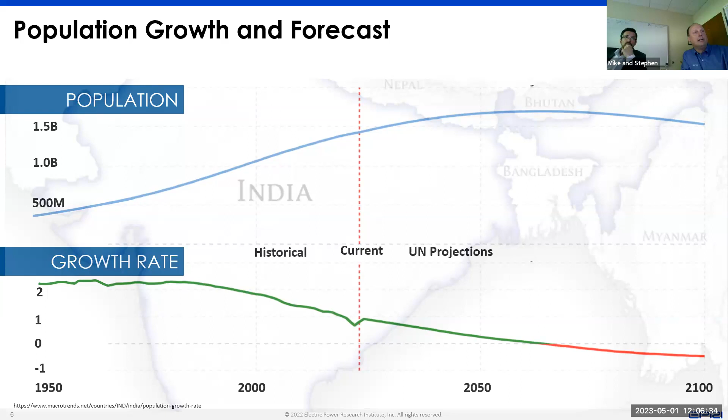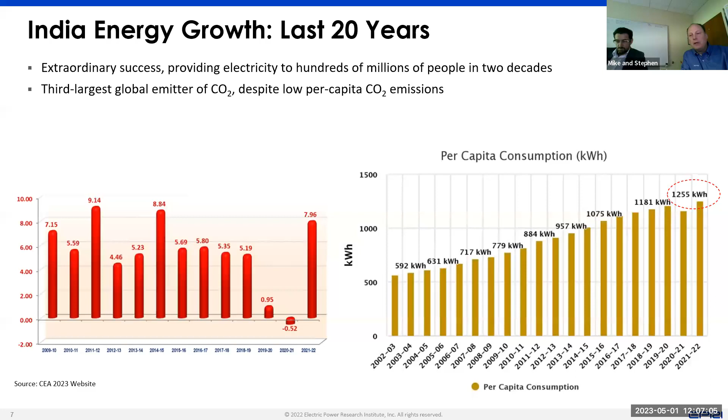There's been a lot of growth in population and in the power generation source. Over the last 20 years, you can see on the bar graph to the left what that extraordinary success looks like in providing power to hundreds of millions of people in India, with a consistent 7 to 8% growth rate over the last 20 years. But what's unique about India is that even though they're the third largest global emitter of CO2, it has a very low per capita CO2 emissions profile.

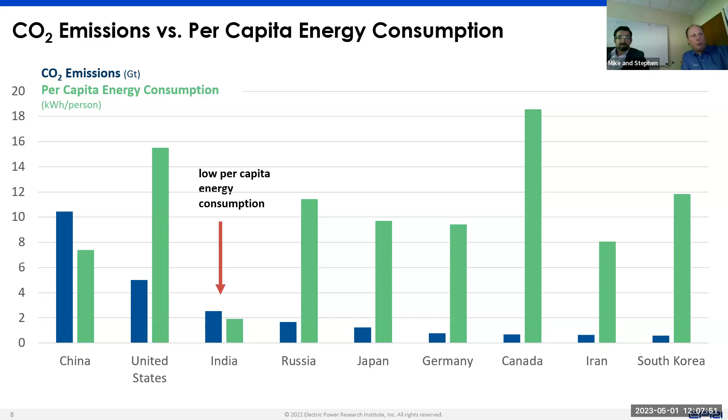If you compare that low per capita energy consumption to China or the United States, the blue bar represents CO2 emissions per country. India is very low, 1,255 per capita, compared to China which has almost the equivalent population. That's important to think about when looking at global CO2 emissions and the world emissions outlook from a decarbonization strategy perspective. Mike will shine some light on that later. You can see where India is today, where China is today, and try to figure out where India will be in the next 15-20 years. It's going to be an interesting story yet to come.

So to put that in perspective, where does most of the power generation come from in India? It's no surprise that most comes from thermal coal plants. The black bar shows January 2022 to January 2023 data. Power generation from coal-based thermal assets is somewhere between 107 to 120 billion units of total power generation, compared to nuclear, the orange bar, and hydro, the blue bar, which is very low.

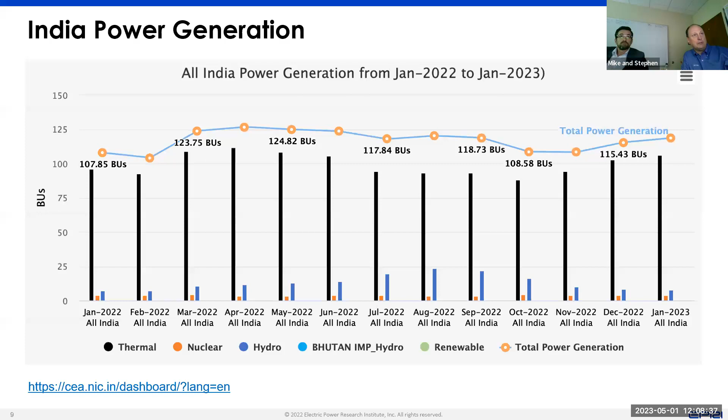Now, if we compare that thermal-based generation to renewable-based generation, in that same 2022 to 2023 time frame for India, we're somewhere between 10 to 12% total renewable capacity. This is all the renewable generation in the form of wind and solar.

We always see an uptick in wind generation right at the onset of the rainy season in India. Between May and June is typically when we see the peaks in renewable energy generation. That represents about 10%.

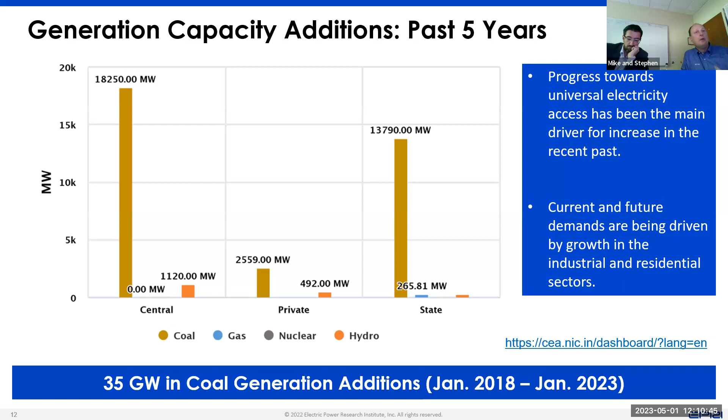What's fascinating about the energy transition in India is to see where they're going in the next 10 years. A lot of progress towards universal access to electricity. If we look back 5 years, even though there's been a lot of growth in renewable generation, India had 35 gigawatts in coal generation additions between 2018 to 2023.

A lot of that in the central plants. A lot of changes have happened in India over the last 20 years. When we look at decarbonization strategies in the United States and Europe, it's very different than decarbonization strategies in India. Most of India's strategy for decarbonization or reducing carbon intensity has been to shut down the older subcritical thermal generating plants and go to more supercritical, more ultra supercritical.

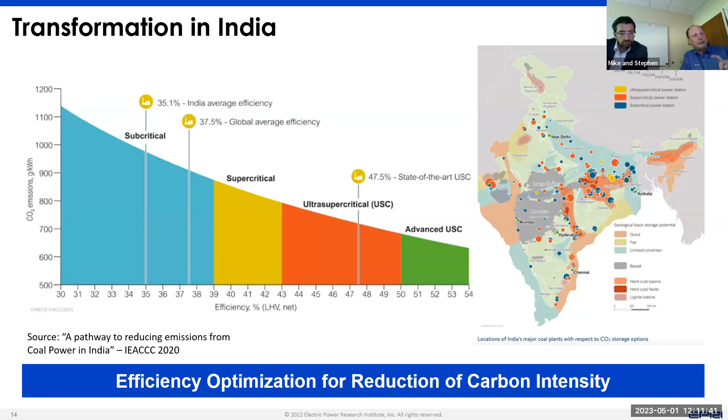Most likely we'll see one of our first 760C plants built in India or China in the future. So the focus has been to optimize decarbonization by improving the efficiency of these plants. What we've seen over the last 20 years is that heat rate is very important—the efficiency of these thermal plants, how we operate them.

Typically, if we want to put it in three buckets, the opportunities for air pollution control relate back to optimizing boiler efficiency, optimizing turbine efficiency, and reducing the aux power of these plants. What we've seen historically is if these units aren't operating at their design efficiencies as built, they can have an increase in actual emissions on the magnitude of 25%.

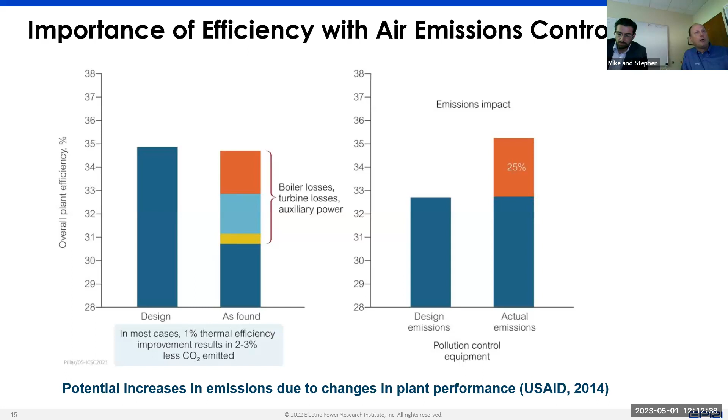And that might be all emissions—NOx, SOx, CO2 footprint. So anytime we can gain a 1% thermal efficiency improvement, this typically results in somewhere in the magnitude of 2 to 3% less overall CO2 emissions emitted.

In 2019, India commissioned their first ultra supercritical plant, a 1320 megawatt plant at Khargone Station, 603 degree C plant, 270 bar. A lot of environmental controls—you can see this unit had wet flue gas desulfurization, hydrated lime for mercury control, and a ZLD system for managing water treatment, which is a significant issue in many parts of India where water constraints exist.

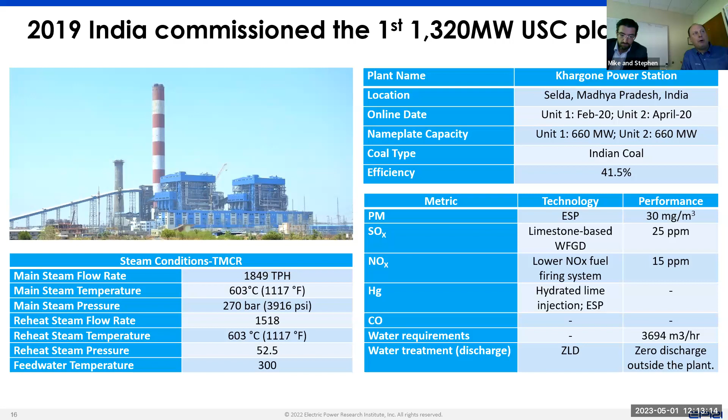When I look back to 20 years ago, when I made my first trip to India and drove down the highways looking at the emissions, looking at where India has gone over the last 15, 20 years, there's been some significant improvements in air quality and air emissions.

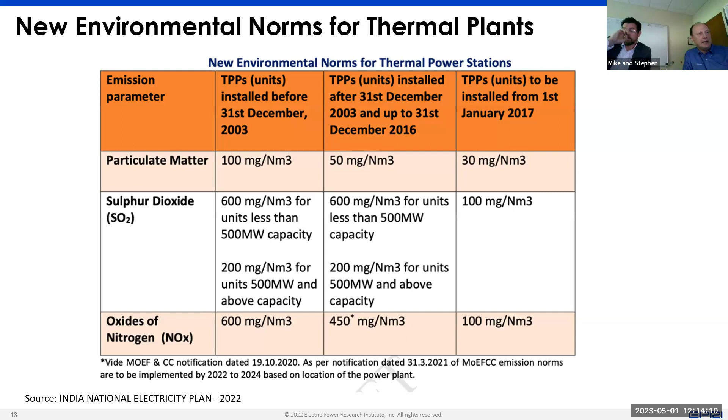We can look here at what India has done with their environmental norms, comparing units built before 2003 in the far left column. In 2016, we saw a pretty significant tightening up of the particulate matter and the SO2 and NOx emissions requirements. Now anything built after 2017, we can see those environmental regulations continue to tighten up in India.

So a lot of changes in environmental norms, how you're managing those norms, but probably the biggest change I've seen in India over the past 5 years has been really politically driven. Prime Minister Modi has made some pretty significant commitments for India. What I'm representing here on this slide is some of those commitments: 500 gigawatts of non-fossil energy capacity by 2030, 50% renewable energy by 2030, 45% economy-wide carbon intensity reduction by 2030.

Notice I didn't say total decarbonization, because India's carbon footprint is actually increasing, and it will continue to increase because of the demand for power generation in the next 10 years. But their economy-wide emissions are going down because they continue to integrate more advanced supercritical units. They're also integrating more renewable energy. So pretty substantial change when you look at that portfolio change.

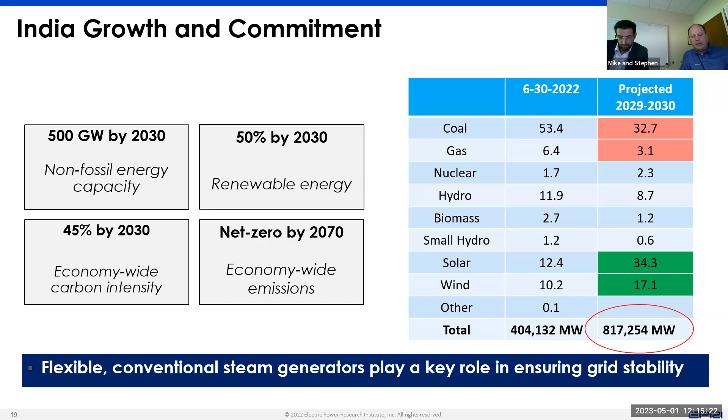To be able to get that 50% non-fossil power generation goal, that means a lot of solar, a lot of wind generation that operates at a much lower capacity factor is going to be operated. So they've got to have a much larger generation portfolio to meet current demands, which is just over 200 gigawatts of power generation by 2030. The forecasted expectation for coal-based thermal plants is going to be something closer to 250 gigawatts of generation.

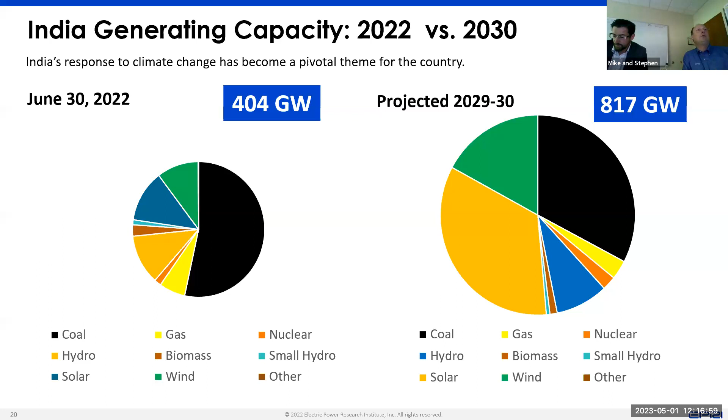But to be able to meet those targets that have been committed to by the country, this is what the expectations are. Again, pretty ambitious. I don't know if India will actually achieve that 817 gigawatts of power generation, with 50% from renewables, but they're certainly strongly heading towards that path forward.

So if we look at India's energy growth over the next decade, these are just some different scenarios. Say if we have delayed nuclear, delayed hydro, conservative estimates, or increased demands—people buy more refrigerators, more EV integration, or demands go up—there's forecasted to be somewhere between 240 to 260 gigawatts from coal-based generation to meet those demands with balance in the grid.

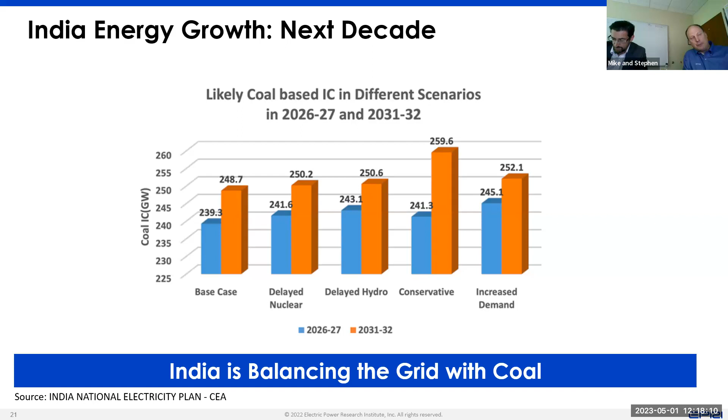What's different with India is if we look at North America, if we look at Europe, and see how we're balancing the grid, we're doing it with thermal generation, but most of that is coming from fast start gas turbine engines or combined cycle gas units that have a much greater overall thermal efficiency, whereas India is really balancing the grid with coal-based thermal generation because they have such a small portfolio of gas. They don't have the same infrastructure from gas and hydro as we see in other parts of the world.

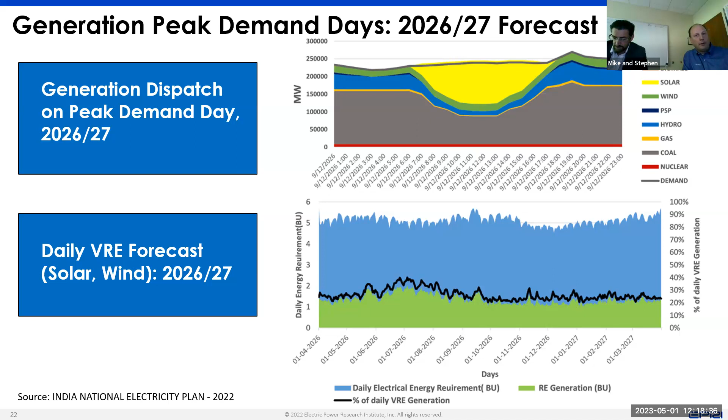So this is some of the forecasts for VRE integration. Remember, where we were in 2022 was somewhere between 10-11% total VRE generation. By 2026, 2027, India is looking at somewhere between 20 and 30% total generation. We really see that duck curve starting to form over the next few years in India.

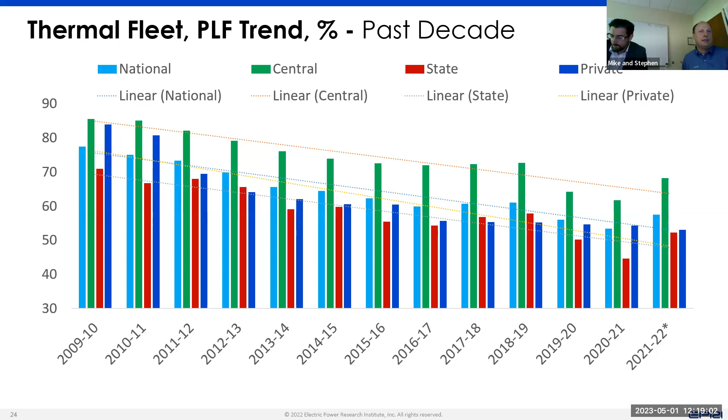And then when we look at the demands on those thermal plants, what's that doing to the thermal-based generation? We could just look back in the rearview mirror at the last 10 years. If we look at 2010 to 2021, 22, we can see that thermal-based coal generation went from somewhere closer to 90% capacity factors all the way down to something closer to 70% capacity factors on average.

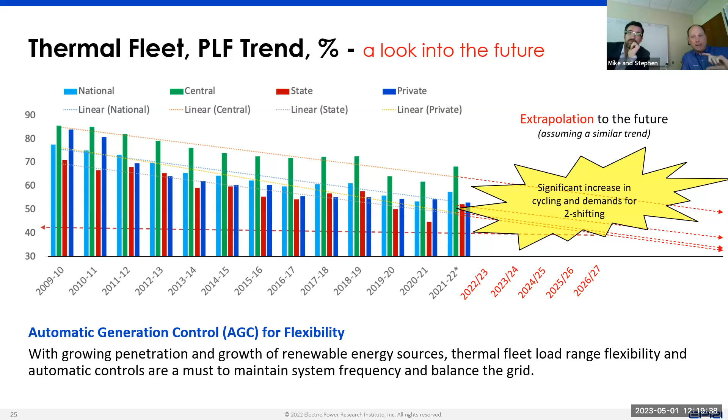And then if we look at what that trend looks like in the future as we go forward, and we look at that 2026, 2027 duck curve and bring that average back, that means that just in the next 5 years, India is likely to go from 60-70% capacity factors to something closer to 40% capacity factors, which means the demands for automatic generation control, the demands for two shifting, the demands for cycling on and off of this power generation, mainly from coal to balance the grid, is going to come from coal-based generation.

And so then if we look at the duck curve, or as our CEO at EPRI would say, is becoming more like a canyon—the duck is getting fat, or is becoming more like a canyon. And Mike's going to share some global perspectives on kind of what the industry has done.

But if we look at the forecast for 2031, 2032, and we look at all that wind and solar that's coming into the grid in India over the next decade, we essentially have to make up approximately 250 gigawatts of generation. If the wind stops blowing, the sun sets at the end of the day, that could be the magnitude of 250 gigawatts of generation that we have to bring. That thermal-based generation has to be able to meet those demands up and down on load.

Anybody that's ever worked in thermal efficiency or been a BTU chaser like me for the last 25 plus years, managing thermal efficiency on these plants across the load range is somewhat difficult. And as we go to lower and lower capacity factors, managing that deviation for the design baseload generation, which most of the Indian coal plants were designed for baseload operation, as we come back to something less than 50% of their maximum continuous rating, you can see that has a pretty significant impact on thermal efficiency.

And when we have a degradation in thermal efficiency, one thing the Central Electricity Authority and the regulators in India have done is they've imposed a tariff, which they call the ECR, Energy Charge Rate, for operating in an inefficient manner.

The discussions between CEA and the Ministry of Power last year were that anybody operating a plant over 2,500 kilocalories per kilowatt hour was basically going to have to shut down or close the plant in the future. After some of those forecasts came out in January of this year from CEA, the Ministry of Power and CEA came back and said, you know what, we changed our mind.

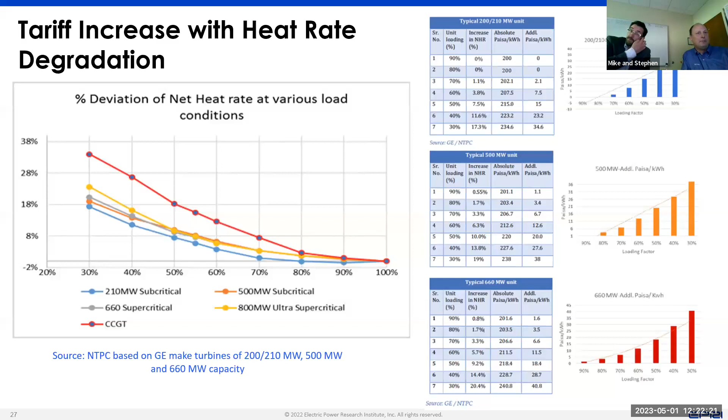Don't shut down any plants until after 2030 in India, because we're going to need everything to meet those future demands. Some of the stories we've seen around the world—what's happened recently in Texas, Tennessee, the Carolinas, and other parts of the world—have really opened the eyes and perspectives, which Mike can talk more about. But one thing that's unique in India is that ECR matters, and that tariff depends on how efficient those thermal plants are.

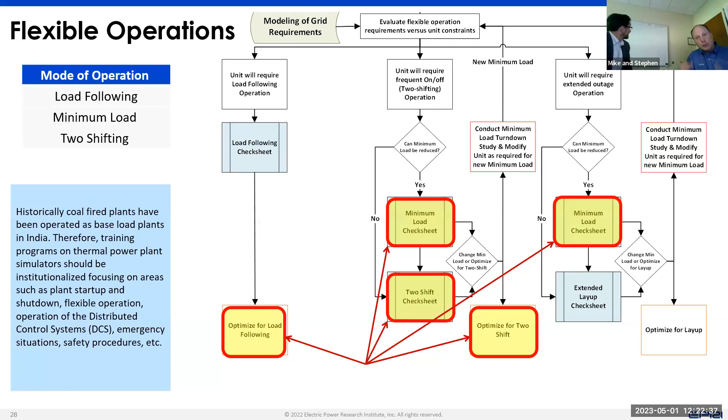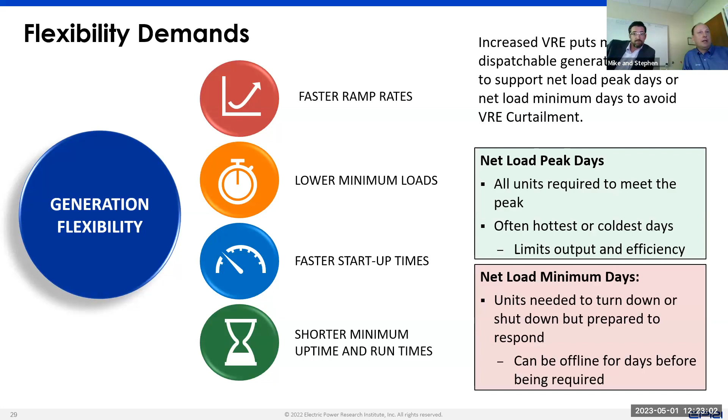As you go through these different modes of operation—whether it's load following, reducing your minimum load, two-shifting—we've got to be able to optimize across the fleet. That means meeting those faster ramp rates, meeting those reduced minimum loads, expanding the load range, bringing units on quicker so that when the sun goes down, we can meet demand without rolling blackouts, and do that on not only the net load peak days, but also the net load minimum days.

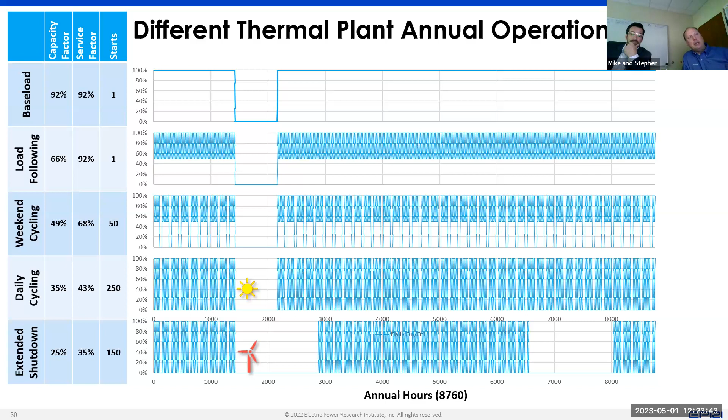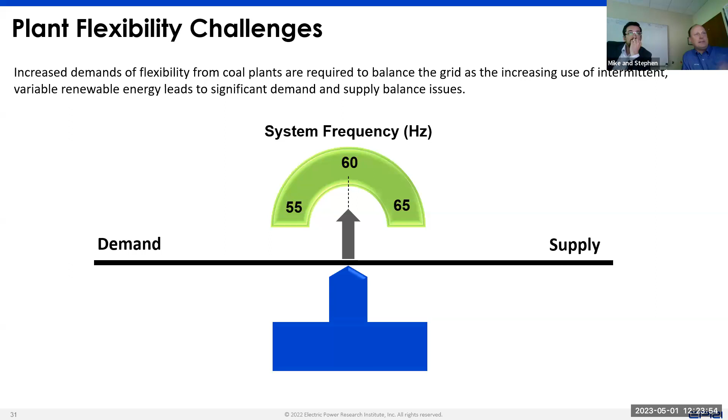Rudy saw me posting a lot of presentations on LinkedIn about building our capacity base and trying to get these thermal plants ready for flexible operations in the near future. That's really what inspired this webcast: what is India doing for their energy transition? How are they balancing system frequency, managing supply and demand across the load range, with their story being very different?

Earlier I mentioned that most of North America, Australia, and most places in Europe are doing it with 1x1, 2-on-1, or 3-on-1 combined cycle plants, or simple cycle gas turbine engines that can start up and shut down within 1 to 4 hours.

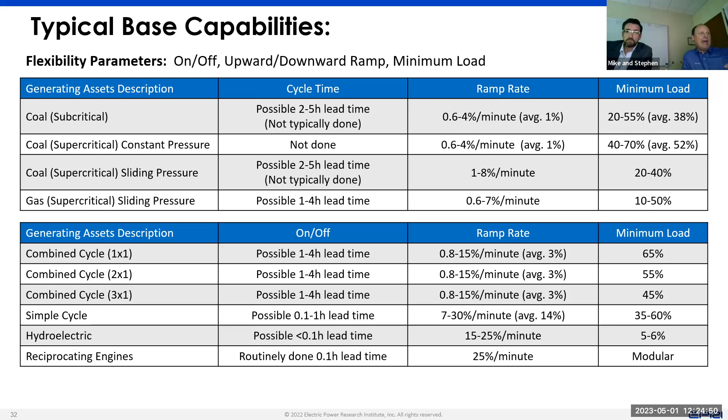India, again, what makes their story very unique is they're integrating a lot of renewable energy, but they're doing all the flexibility with coal-based generation. That means India is going to have to do their balancing by two-shifting those plants, more cycling of the plants. Obviously they've got some hydro, some gas, but very little compared to other parts of the world. So that brings up reliability considerations and concerns for India.

As we've studied over the last 30 years at EPRI, we've got a pretty significant database of information through NERC's GADS data. In 2021 we did a study, looking back at historical data to see what we can learn from the past. What we identified is that we see a significant uptick in reliability degradation when you drop the minimum load on a thermal-based generation asset, and certainly when you two-shift that asset.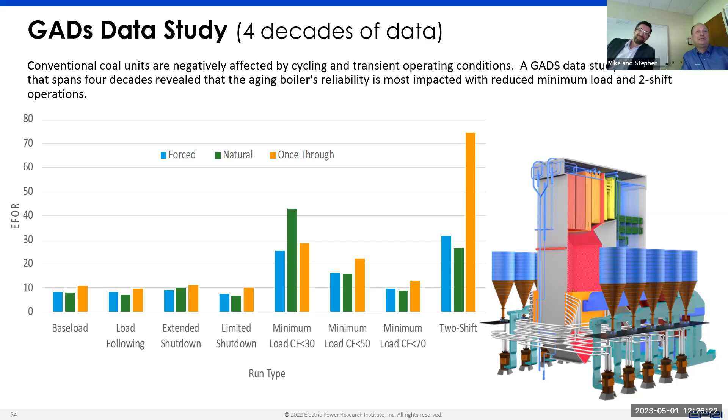But what we've learned historically from the past is these supercritical units really don't like two-shifting, and the expectations for two-shifting are going to be significant in the future for India. A lot of that revolves around how you're managing water chemistry.

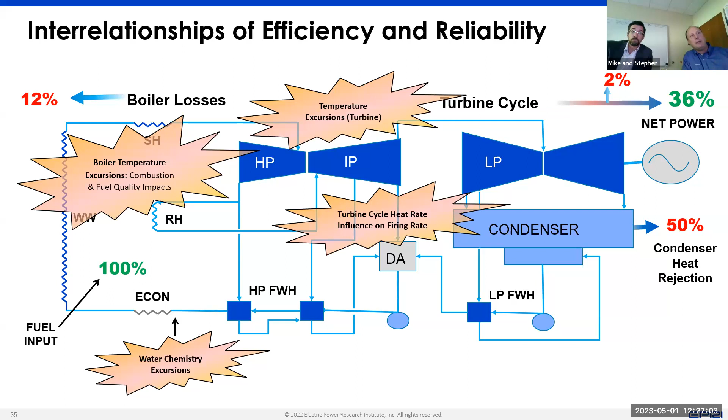Now, another thing that's unique about the Indian story is that most of the domestic coals fired in these Indian-based thermal plants have somewhere between 40% to 60% ash content.

So as we continue to modulate the loads down to lower loads and cycle them more, what we're seeing in India is a lot of challenges with flame stability. A lot of these large boiler houses that were designed for higher gas velocities are having issues with ash deposition as they drop to low loads.

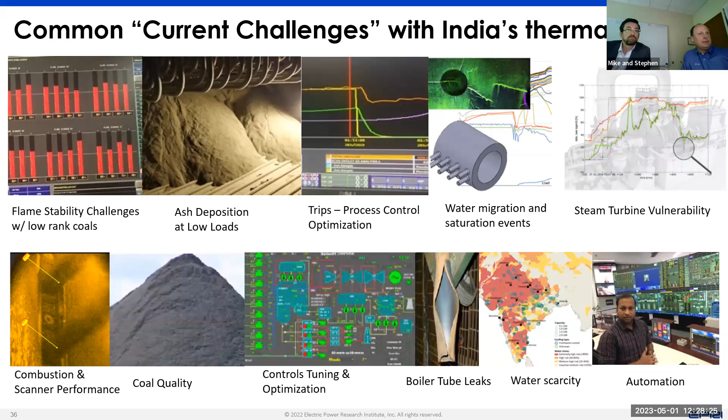When they do have mills trip, that can result in a boiler trip because of process control optimization issues. And when you run into situations where these load modulations might be related to process, chemistry control, or flame stability issues, these can result in saturation events where you have slugs of water going into a superheat or reheat header. That can cause reliability issues, not only mismatch issues at the turbine, but also potential damage to boiler components. So a lot of challenges exist in the future for India.

So what we're doing at EPRI to support the Indian industry is to share lessons learned. We're going to need to do increased startups, operate in AGC, spend more time in economic shutdown. But what we've seen is that as we operate with lower and lower capacity factors, the fixed cost of generation goes up for these units. So as we cycle them more, we see more potential opportunities for damage mechanisms to come into place. But the reality is that these plants are operating with financial constraints because the power generation and capacity factors are much lower than what they were in the past, and they're going to continue to go down.

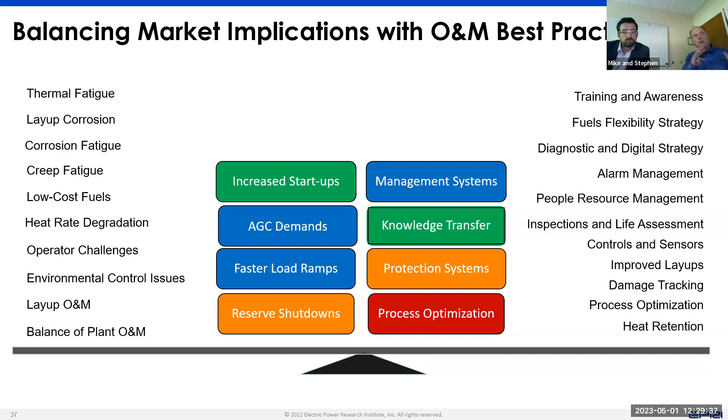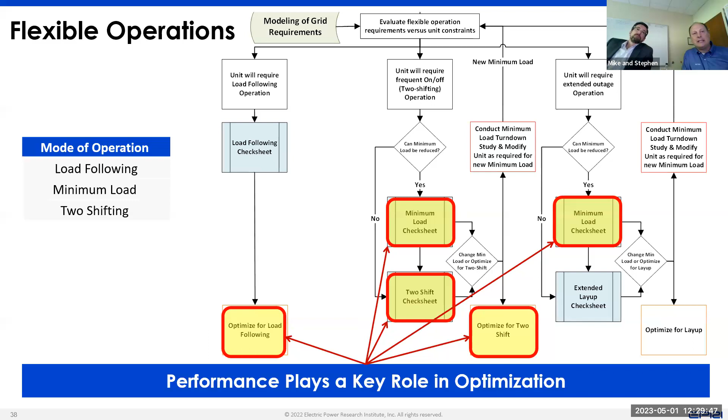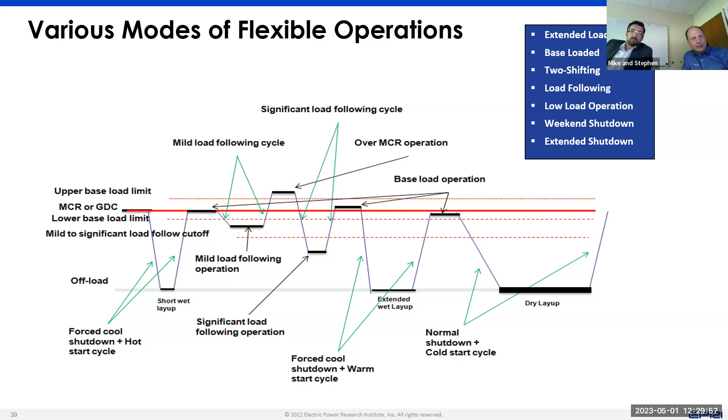So India has to develop this work smarter, not harder mentality, where we enhance the management systems, we enhance the knowledge transfer, we enhance the protection and defense systems — that might be procedure improvements, process optimization improvements. There's a lot of changes that come with the energy transition as we go across these different modes of operation. But performance always plays a key role in optimization, and performance has a huge impact on the reliability of these units as we go through these different modes of operation, to ensure reliability of things like pressure parts and components.

So when we look at the different subsystems on a typical supercritical system, we have to optimize the inputs. We need to make sure that we have stable and consistent fuel quality so that we can manage flame stability, manage the combustion process, and manage the heat rate across the load range of these units.

And as we cycle them more, we've seen a lot of issues with plants not having furnace exit gas temperature control, or more accelerated erosion because of cycling and pushing off maintenance outages. That can result in challenges with stoichiometry and O2 control, which negatively influences things like gas velocity or air-to-gas control on these systems, influencing not only combustion and boiler performance and overall heat rate, but also the environmental performance of these units.

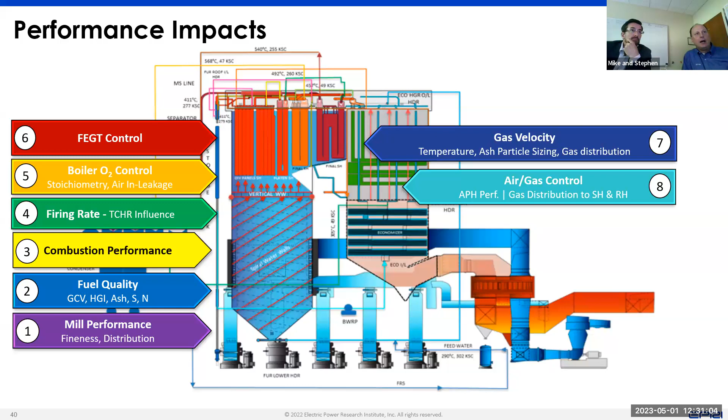So it really creates this complexity where operations requires you to go through these different subsystems of the thermal plant, make sure we've got the key performance indicators we're managing, make sure we've got the protection systems to mitigate potential damage for these different systems, and then we have to take into account the cost for these different systems. And like I mentioned earlier, it's important to align risk with cycling.

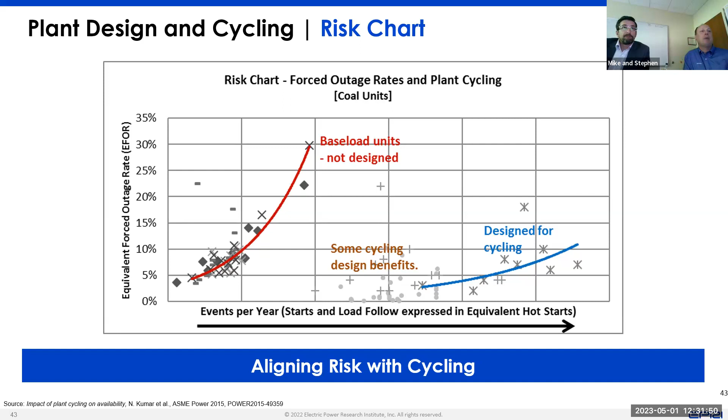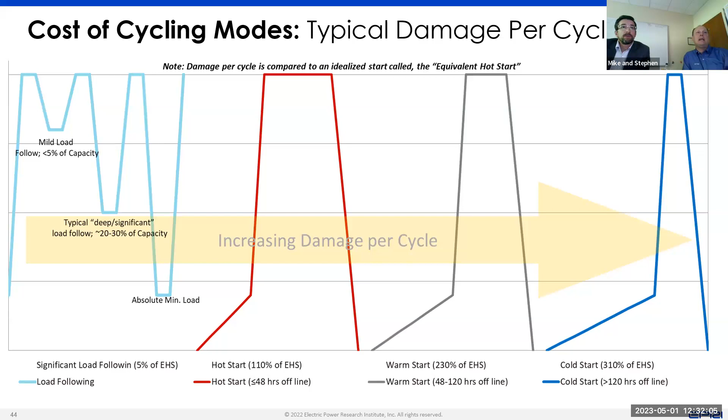A lot of these units built in India over the past 30 years were designed for baseload operation, not designed for cycling. So we've seen some pretty unfavorable degradation curves based on more startups and shutdowns. As we go to more and more startups and shutdowns, that means we're going from baseload operation to seeing more hot starts, more warm starts, more cold starts, or maybe staying offline for weeks or months at a time. And what that converts to is cost.

So as we go across that spectrum of operation and look at the variation of cold, warm, and hot startups, what we've seen is that these can cost anywhere from $100,000 to $400,000 per startup, whether that be a cold, warm, or hot startup. So we need to align a strategy on how we manage those costs, how we can mitigate damage, and how to operate with those different load scenarios.

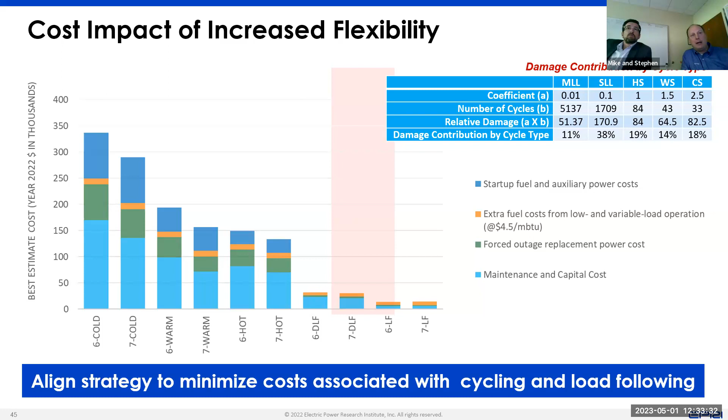We also need to understand that different cycles — whether a warm, cold, or hot startup — result in different damage rates for those scenarios. What I'm showing in the table to the right is the relative damage for different coefficients: mild load follows, significant load follows, HS for hot start, warm start, and cold start. In this scenario, you can see most of the damage is done by significant load follows, even though the overall cost might be less for a load follow compared to a cold or warm start. But if you're doing 170 different significant load follows, that cost adds up over time. So it's costly to operate in a flexible operations manner.

There's been a lot of studies done in the last couple of years on O&M cost impacts for a typical subcritical unit versus typical supercritical units. One of the eye-opening scenarios is that the cost for a subcritical typical 210 megawatt unit is much lower, in the magnitude of 50 to 100 Indian rupee lakhs per event, versus a supercritical unit, which might be anywhere from 120 to 262.

To put that in perspective, 262 lakhs is over $400,000 US per startup. So not only is there a reliability function and cost for these different startup and shutdown scenarios, but also...

oil consumption for those starts and operating with flame stability at low loads is a big deal for India, because fuel oil costs are extremely high. Even though they're not too far from the Middle East, their oil costs are very, very high, and they have a big influence on that energy charge rate and the heat rate impact I mentioned earlier.

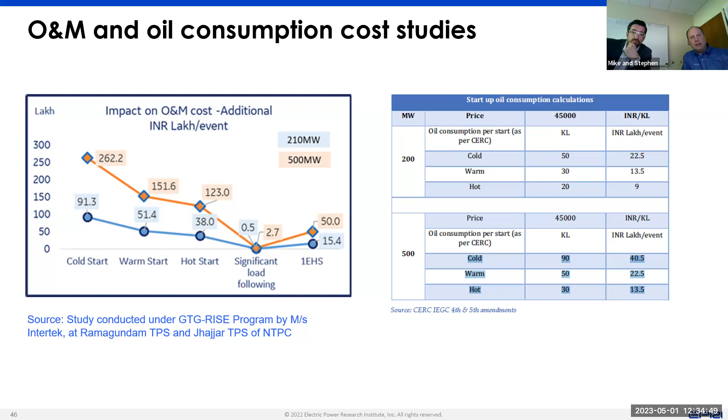So all that needs to be considered in their flexibility program.

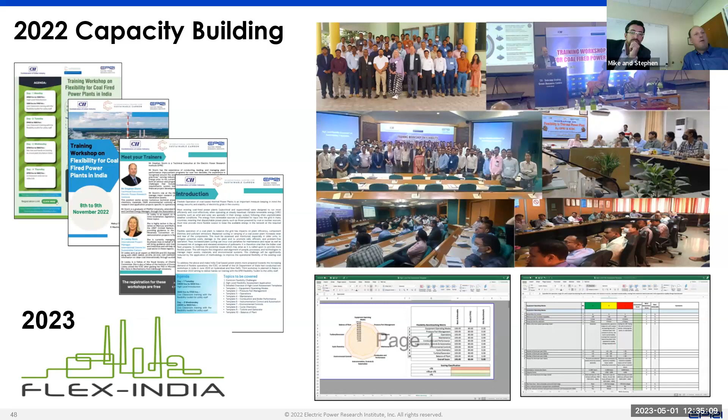So managing that flexibility over the past couple of years, EPRI's been very involved with holding these capacity building workshops. We built some tools for doing vulnerability assessments to try to understand how the Indian industry is managing that flexibility across the load range. We've been working with Indian thermal plants on a systematic approach to flexibility, understanding the importance of their market missions, especially since India just in the last two years went to a real-time balancing market.

If we fast forward to 2030, India's ambitious plan is to have more than 50% of the energy coming from renewable energy in less than 8 years from now.

So setting goals, understanding the roadblocks, establishing failure mitigation plans, integrating data analytics, diagnostics, dashboards, and just working towards that fleet optimization strategy is critically important for India.

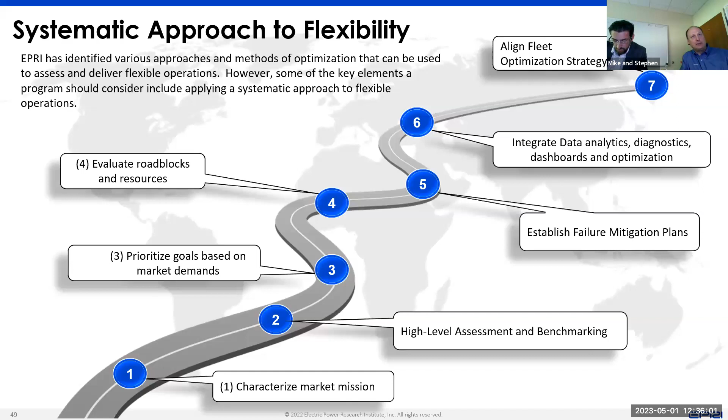So we've been doing a lot of work with industry on trying to align people, process, and technologies when you look at these different parts of the thermal plants, and really trying to understand what their risks are, how they're going to achieve reliable, safe, affordable, environmentally friendly power generation in the future.

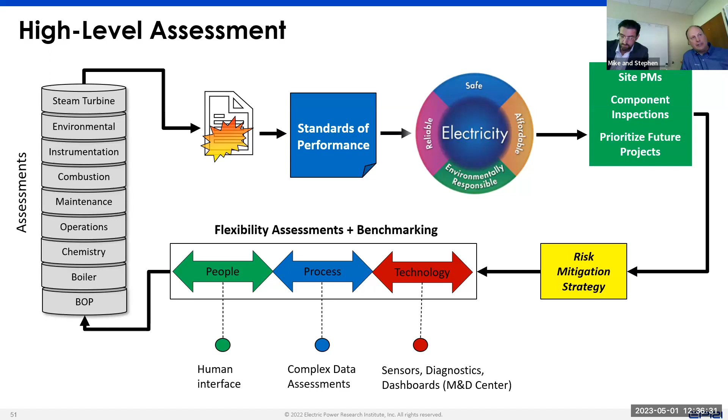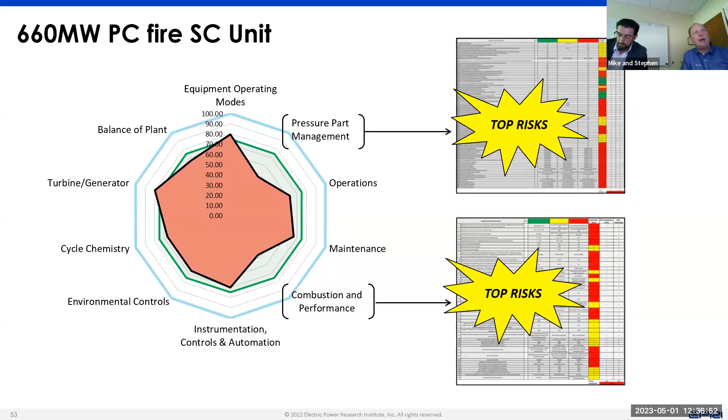How do we tie that into risk mitigation strategies, and then use things like complex data and complex vulnerability assessments to really identify where their gaps are, where the roadblocks are in the future, understand how to assess those different thermal plants, understand what their risk is, and try to create this fingerprint of issues so we identify what is yellow, what is red, what is vulnerable, what is at high risk, what needs to be improved upon.

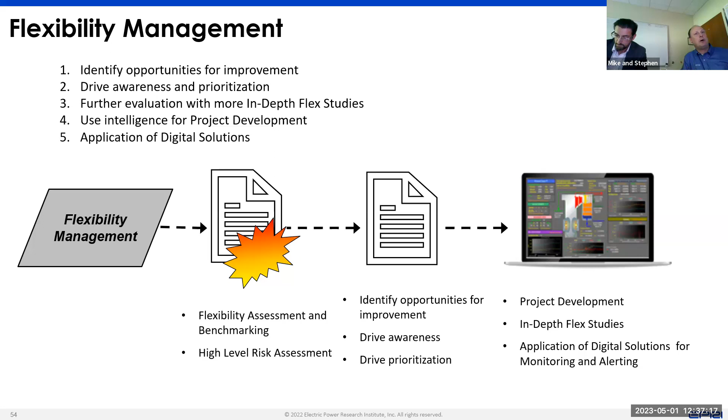So there's a lot of work being done on improving operations, improving flexibility, improving digital technologies, a lot of integration of advanced process controls and turbine water induction protection systems, to be able to mitigate catastrophic failures on those major components, and really align that fleet optimization strategy, not only for when these thermal plants are online, but also offline.

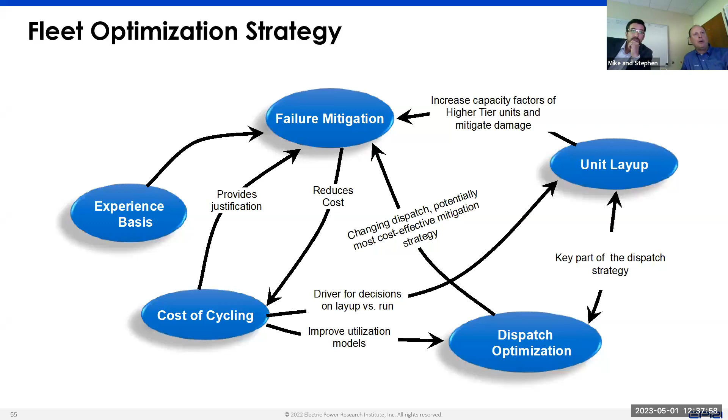And very much like the U.S., we've also seen in India, when a lot of those thermal plants came on 25 years ago, those were great jobs and people never left. So there's also an aging workforce component in India, where we've got a lot of opportunities for knowledge transfer improvements, but also a lot of opportunities for India to learn what we've done in other parts of the world, because operating outside baseload operations is very new to India.

So that was pretty rapid fire overview. Mike didn't believe me that I was going to get through 55 slides in the first 30, 40 minutes.

But at this point, I'm going to turn it over to Mike to share some perspectives on what's going on with the energy transition from more of a global standpoint.

Mike? Great, thank you very much, Stephen. So I remember when I was still in college, we would always ask the professor if all of this was on the final. I understand from Rudy, everything Stephen just shared will be on the final. So hopefully you absorbed every bit of that content.

So Stephen went deep, right? There's a lot of challenges and a lot of nuances as we transition our electricity fleet. And as we bring in these new resources, they introduce new opportunities, but new challenges, right? So a lot of our newer resources are zero carbon, which is fantastic. It's addressing a worldwide issue that we've been building to ever since the Industrial Revolution.

But they're fundamentally different assets than what we've used in the past. In the past, our thermal generation has been things where we can add more fuel or allow more water to fall down through a hydro turbine to get more power. What we're increasingly building, though, are assets like wind turbines and solar plants where we can make use of a lot of energy, but we can't force that energy to be there when we need it.

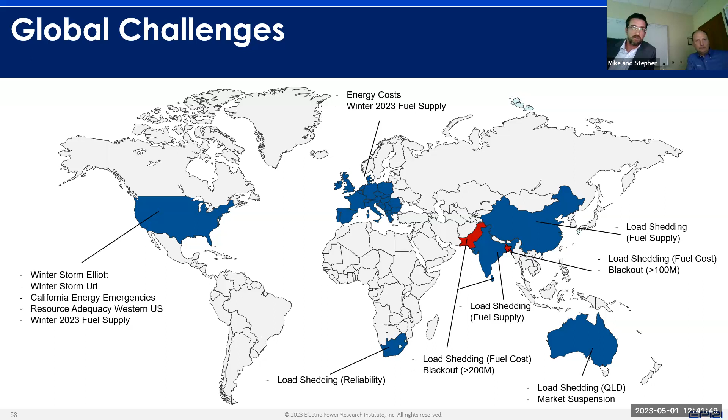Us in the West, we're not immune to this. We've had some pretty significant reliability issues as well. And it all just goes to show you that we're transitioning, but there are challenges here. I'm going to walk through a little bit of those in more detail as we go.

When we talk about energy security around the world, it used to be pretty much about oil. A lot of our security was around oil security. Really, you can ensure your oil security by having a whole bunch of inventory. If I have enough inventory of oil for my country, then I can deal with different shocks in terms of price, in terms of supply, et cetera. 90 days tends to be the rule of thumb that is used.

That's a secure supply that's managed differently than some of our other energy supplies. Talk about natural gas security, we don't have that much storage for that. That's usually pipelines coming in, terminals coming in. That's why when that Nord Stream 2 pipeline was blown up after the Ukraine invasion started, that was a big deal. That's like a point source that brought a lot of gas into Europe that will not be fixed again. So it becomes more of a scenario analysis when we're talking about security.

When it comes to electricity supply, it can all go wrong a lot faster than that. It's minutes or seconds if you have a big enough frequency deviation. Really, we're balancing supply and demand every second, either at 60 hertz or 50 hertz. Here in the US, it's 60 hertz; in Europe, it's 50 hertz. But if that goes out and we start to have power outages, now we have—I like to say, or a lot of people like to say—that electricity represents the first 5% of our GDP, because without electricity, other things can start to fail.

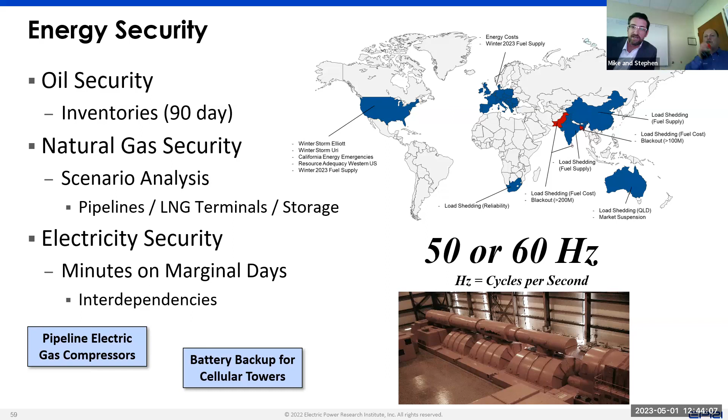So let's walk around the world and talk a little bit about this. In the US, we had one of the most significant events, I think, in my entire career in terms of electricity supply, in Texas, in February of 2021. What made this near-blackout notable is it was a wintertime blackout in a region that's not winter resilient.

If you've been to Texas, you know that they don't build the homes with a lot of insulation. It's not set up like where I'm from, up in Ontario, Canada, where the homes are well insulated and set up for power outages during the winter. You're not going to have water pipes freezing or anything like that.

On the evening of February 14th, 15th, in the middle of the night, Texas was starting to be unable to keep up with its power demand. So around 1 a.m., their frequency—Texas is a different grid than the rest of the U.S., so there's an Eastern connect, a Western connect, and then Texas is all by itself. So it's got to balance its frequency by itself. That morning of February 15th, frequency started dipping.

What does that mean? That means there's not enough electricity supply to meet the demand. A lot of people have space heaters or other electric heating for their house, not well insulated. As it gets colder, they just get more and more demand. And we started to see this deviation. That deviation is important for an electricity network—everything's synchronized to whatever that grid is. So in Texas, it's a 60 hertz grid for ERCOT, which is their regional system.

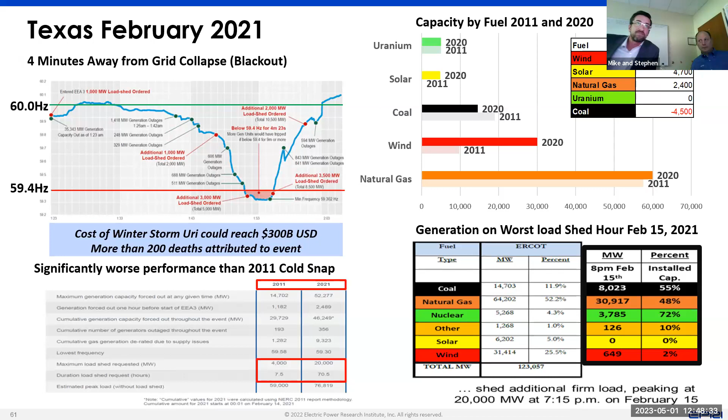Now, we had another winter storm just recently, Winter Storm Elliott. Texas didn't become a big problem here. The big thing there is Texas may not have really fully addressed all its resiliency issues. It just didn't get as cold in Texas during Winter Storm Elliott as it did back for Winter Storm Uri.

We did have rolling outages for the first time now in Tennessee, in North Carolina, as well as in Kentucky, although I don't have it on the slide. They were more like in the order of what we saw in Texas back in 2011, not what we saw more recently in 2021. This is an embedded risk factor that we need to continue to manage as we go through the energy transition.

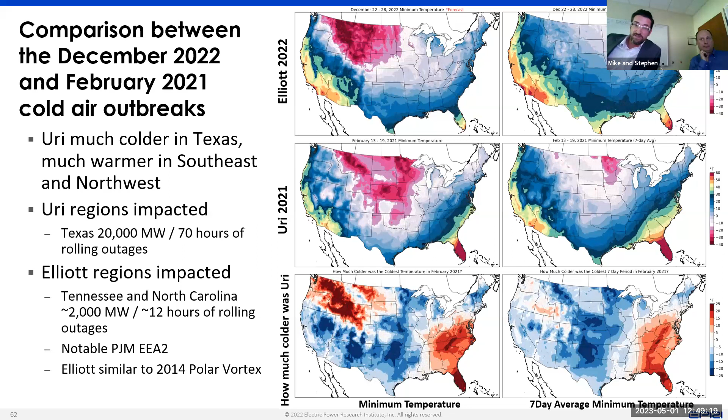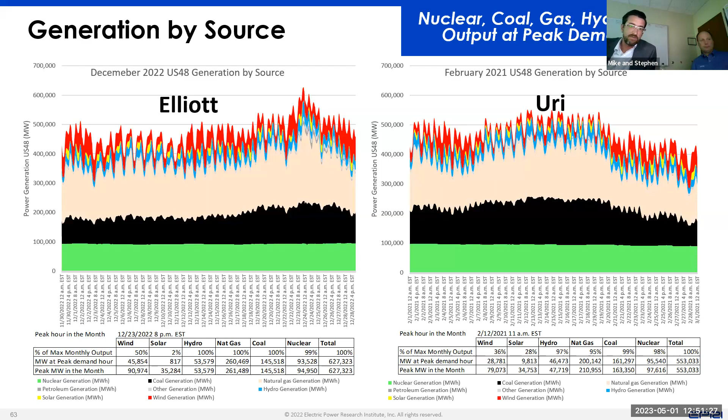We need to have dispatchable generation to make these hours work. And if we don't, we're running some real risk in the transition. And if we look, like we saw in Texas, we're not continuing to build these assets, and that can potentially be a problem, and it showed itself in the Texas case.

We look at, so that's a winter case. We get the same sort of issue in the summer. So in California now, we have risk of power outages in the late summer. We've built a lot of solar in California, and it's great when the sun is up. But in the late summer, the evenings stay hot, but the sun sets earlier and earlier and earlier.

The first time this really resulted in issues was August 14th of 2020. They had rolling outages as the sun set. As a response to that, they've spent several billions of dollars trying to put in temporary gas generation to try to address it. Another thing that occurs in California is they have an enormous fleet of backup generators, much greater than the rest of any other state typically would have. And they're continuing to battle this.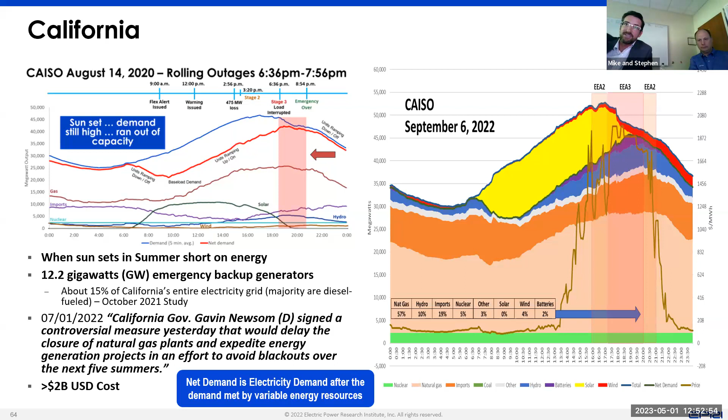So in 2022, they had similar issues in early September. It was a hot period. They had about a week's worth of what they call EEA3s, or Energy Emergency Alert 3. They didn't actually load shed, but this is the alert level they have to be at to then load shed, to basically cut power to suppliers or to people who are using that electricity to try to balance things. And it's that sunset as the evening comes in the late summer where it's a real challenge.

If we zoom out a little bit, so NERC's responsibility for doing reliability assessments for North America. You can see they do it ahead of the summer, they do it ahead of the winter, and they do a long-term one. And you can see that really in the West, we have risk identified for most of the Western regions in terms of reliability.

Just recall, really the only one that went into that EEA3 but didn't have rolling outages was California last summer. Remains to be seen what we see this year. The summer reliability assessment for NERC is not out yet for this summer coming up.

On the right there, you see that a number of the Southeast regions were identified as at risk for EEA3, or for reliability issues. They actually occurred in Carolinas, in Tennessee, as well as in Kentucky. We had rolling outages in all three of those states for the first time ever.

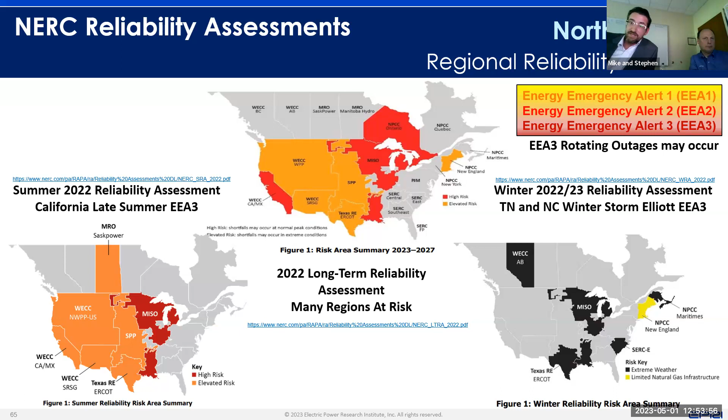And then you can see the long-term reliability risk. Another thing that's happening that's never happened before is use of what the DOE calls the Federal Power Act Emergency Authority. This has been used in the past, but it's being used in a different way nowadays, and it highlights the fact that on marginal days, our system is stretched to the limit. So you can see this is the use, just counts of how often it was used.

So it was used in 2000, I think when Enron had those issues. It was used in 2003 for the Northeast blackout, which was a summer blackout, which has a little bit less risk than a winter blackout. But you can see now in 2020, 2021, 2022, they're using it for very particular reasons.

In California, they use it for what they call max generation orders in the summer. When they go into EEA3, they give out a max generation order, and you can see the language there. It basically says, you know what, yeah, we know we have permits on this for emission control and to protect the environment, but we have to put them aside because we need max generation or we have a risk that the system will collapse, which is not a good spot to be in, right?

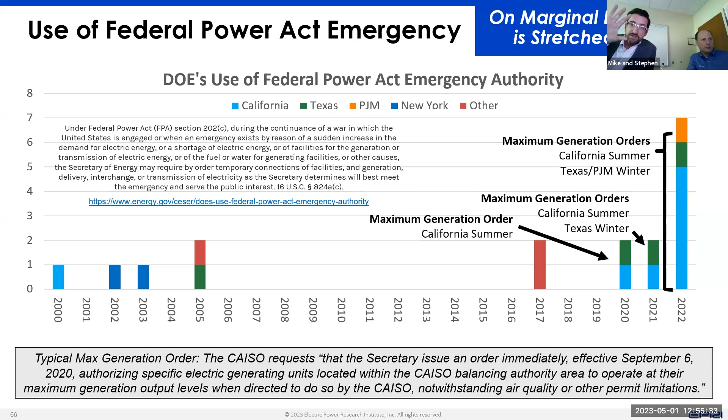So what we want is safe, reliable, affordable, environmentally responsible electricity. But when we're asking for one of these max generation orders where we ignore permits so that we can continue to have reliability, we're not capturing everything we're really looking to do for an electricity system. In Texas, they use these for winter. PJM used it for the first time ever in the winter during Winter Storm Elliott, asking for that same permission. So the system's under some stress.

The prices did get significantly increased. I think there were big economic impacts within Europe. So there's been some of what they call deindustrialization. Some big chemical companies and other companies shut down operations and looked to move out of Europe because their energy costs are too high.

But largely, even though we had a lot of these headlines about concern during the winter, it didn't come to be. We had a warm winter, and they also had built up all the gas storage inventory in Europe to basically 100% type levels. So Europe has gotten through this, but as I mentioned before, there were some knock-on effects to the regions that relied on that LNG that Europe basically took because they could offer a higher price.

So let's just continue on. I talked about in the US sense that renewable, solar and wind can provide a lot of energy, but it can't necessarily provide it during those peak hours, because we can't force the sun to be shining or the wind to be blowing when demand is at its highest. You can see this in the evolution of the German electricity grid.

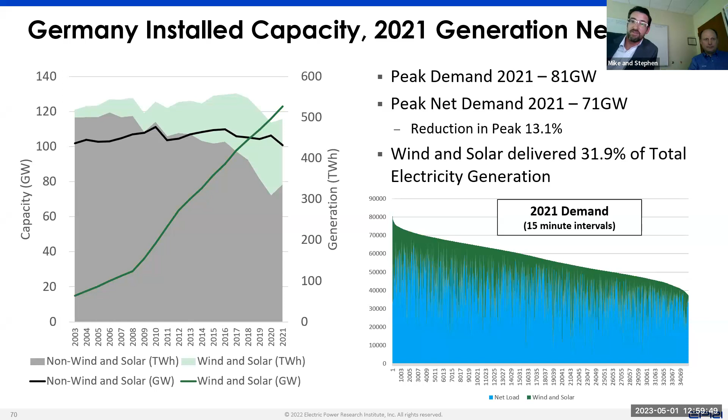So if we zoom out again and we just look at the European Union, on the left there, the green is nuclear generation capacity, the black is fossil, the red is renewables. Again, you can see that same trend. The blue line is the actual amount of generation required in Europe. You can see it leveled off about 20 years ago. We still need basically the same amount of thermal or fossil and nuclear as we did.

We've built a huge amount of renewables, but fossil and nuclear still maintain their capacity, even though it's producing a little bit less energy. You can see that on the right. The red and the yellow is the solar and the wind, and you can see they're increasingly providing more energy. We're seeing less energy from the other assets, but we still need that capacity for the marginal day.

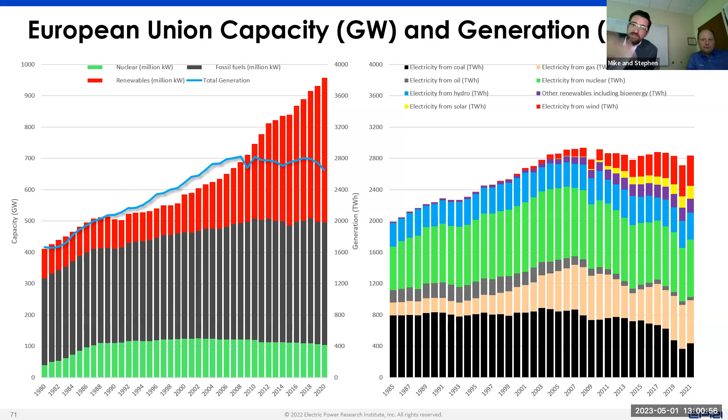So Europe and the US, we're not where generation is growing, right? This is a global problem in terms of CO2 emissions. So we really need to look, as Stephen was showing, at India and China and Asia. So let's do that. If we look at China, they're building everything.

So they're building coal, they're building hydro, they're building wind, they're building solar, and you can see their energy mix continuing to grow. As I mentioned before, they do have load shedding events. They do basically have instances where they want to basically curb demand. So they're still straining to keep up with that demand growth, and it takes the form of maybe periodic outages, especially since some regions are very dependent on hydropower. So if there's a drought, that can be a significant issue.

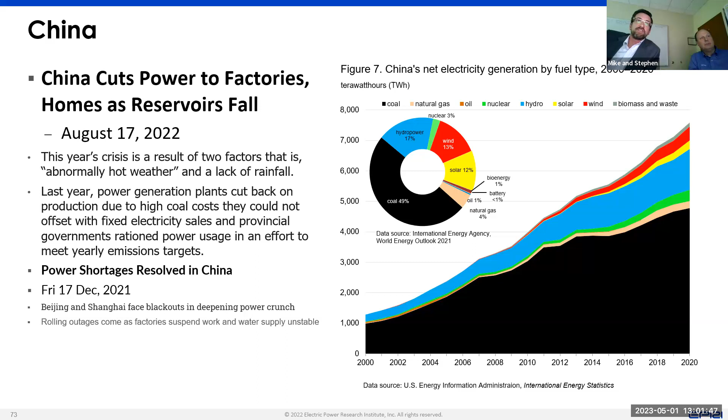But if you look at the actual generation, coal and hydro is most of the generation. Wind and solar continue to go up, but there's that whole difference in, you can build a lot of capacity for wind and solar, but you can't necessarily get the same amount of generation as you could for a nuclear asset or a hydro asset that's basically got access to significant water.

So this generation build out of coal continues. I think everybody has heard that China is back to a record pace for not only installing renewables, but for installing coal. And part of the reason is you need that firm capacity behind there. More renewables should cut their CO2 intensity, but they're going to continue to increase how much CO2 they're putting in the atmosphere for some time. And I believe they are supposed to aim to peak around 2030, same as India.

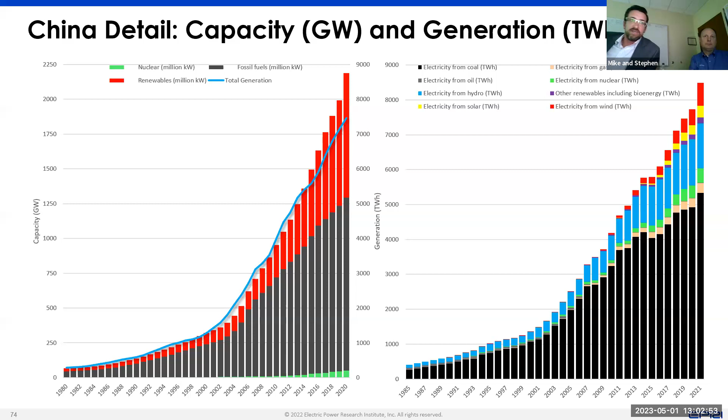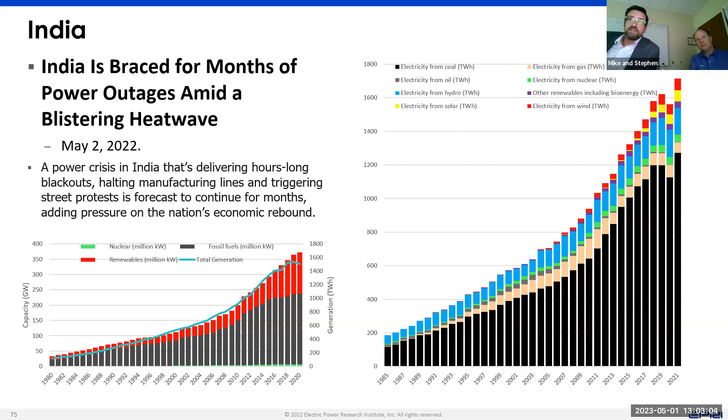If we look at India, we see the same sort of trend. You can see that, yes, a lot of renewable generation is now being built, but the bulk of the generation is still coming from coal assets.

And we talked about some of the outages they've had. For the ones that don't have coal as a backbone, they were really sensitive to those price shocks that resulted when Europe had to start buying LNG on the open market and other fuels to make up for the shortfall caused by not accepting Russian gas.

Sri Lanka is in a very bad situation economically because of their fuel costs, in part, but the economy is in a very bad spot in Sri Lanka.

To mention Bangladesh, they were trying to manage this with basically load shedding, but they did have a blackout on October 4th, affecting 100 million people. I didn't update these slides, but subsequent to the 200 million person blackout for Pakistan, they're now looking to develop more coal plants than they were in the past.

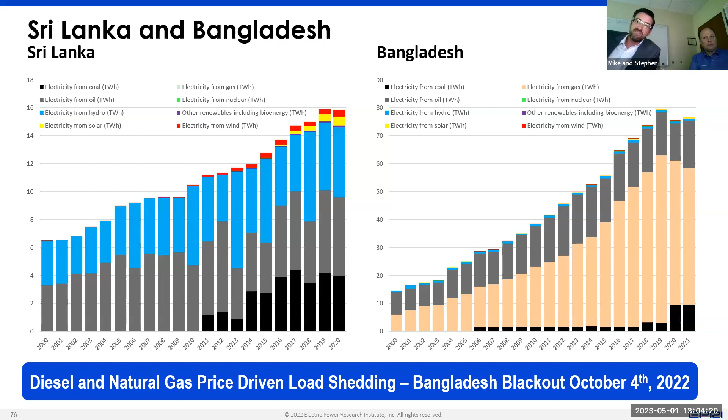Is that good for Pakistan? Maybe in terms of energy supply, but if we're all trying to reduce carbon emissions, that's a challenge, which sort of shows that different regions can have unintended consequences on others if we can't actually achieve that reliable electricity supply.

So as we transition now, there's some other hidden risks here, especially for the West. And Stephen already touched on it. We're not building a lot of fossil generation anymore. What we have is an aging combined cycle fleet and an aging coal fleet.

You can see here what we have is equivalent forced outage factor, the EFOF. So as those get higher, reliability of those plants goes down. As the age of those plants increases, reliability of those plants goes down.

So we're cycling them more to respond to this changing energy mix, but they're also aging because we're not building new ones. So our plants that we rely on those marginal days—so in Texas, the morning of February 15th at 2 a.m., the plants are older than they were in 2011. They've operated a lot more flexibly, and they're not as reliable as they once were.

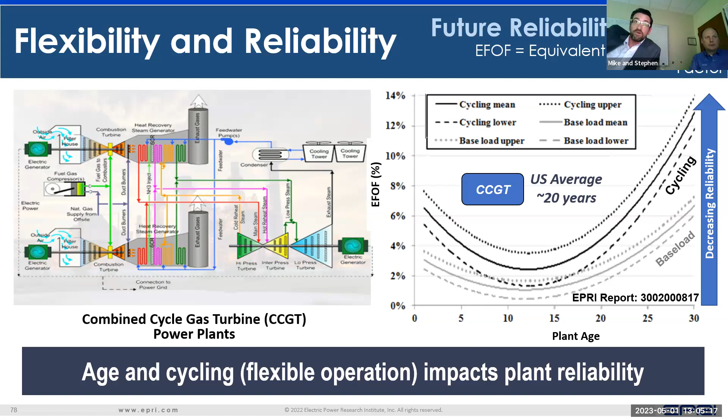That occurs for combined cycle plants, but we also see a similar trend for coal plants. So we've got this latent risk that really there's marginal days where we rely on the entirety of our fossil assets and our nuclear assets to make the day work. But they're not as reliable as they used to be because of their aging, and we're operating them more flexibly. And if we get into that risk on those marginal days...

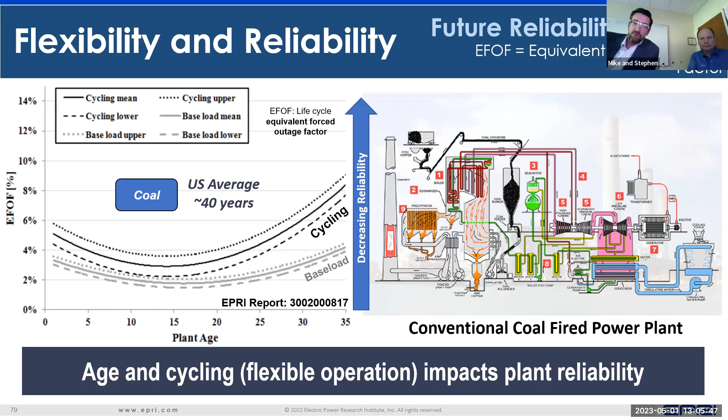So what do we really want you to take away from this? There's electricity supply reliability at risk. There are some real challenges, especially here in the US, where we don't have the transmission network like the Europeans do. The transmission network in Europe is much better.

So it's harder for that frequency deviation to actually occur. We've got spots like Texas where we can have significant issues, and we're more regionalized in terms of our generation in the US. So we've got pretty significant risk for us. Typically, you see costs increase before you see these reliability issues. We've got latent risk both in Europe and in the US.

We've got aging assets. The new assets we're building provide a lot of zero carbon energy, but they don't necessarily provide it on demand. And so the aging assets are needed on the marginal day, and they might not deliver.

So I already mentioned the new assets have limited dispatchability. So we need to start considering the incorporation of storage as we bring those in, if they're actually going to be able to help us on these marginal days. We've got these interdependency risks.

The big elephant in the room, I think, is really what we saw with winter failures, what occurred during Uri, and what occurred during Elliott to a much lesser extent. We do have the real possibility of system collapse. And a system collapse in the winter, if the region is not hardened for winter, is a real significant concern, and something that actually almost happened just two years ago.

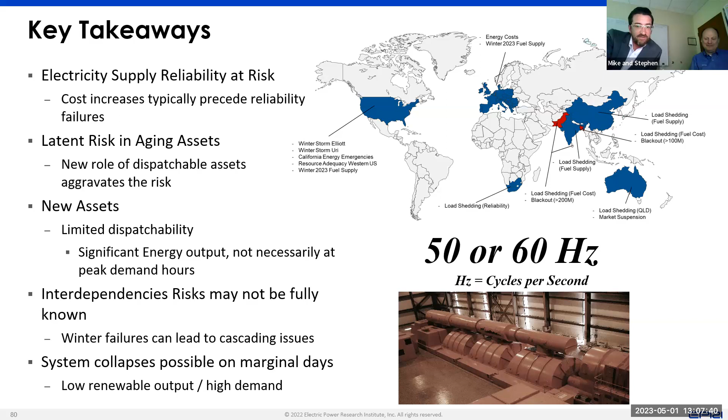Thank you very much, Rudy. Wonderful. Great presentation, guys.